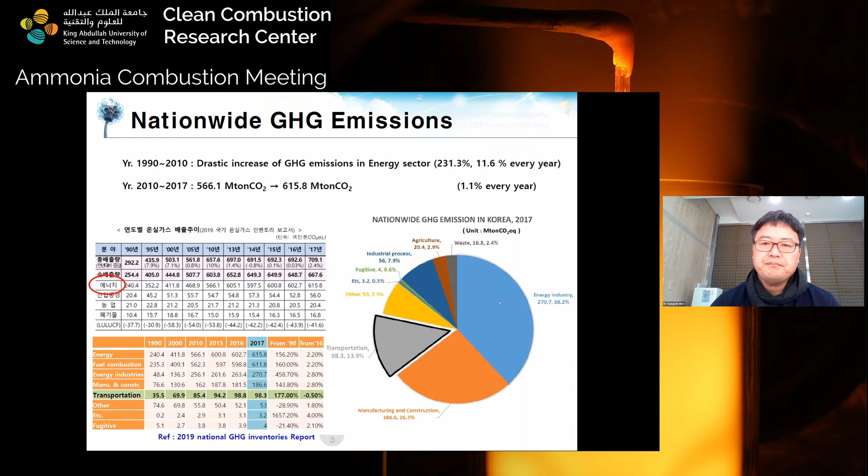This is our previous research and current research. We are one of the governmental research institutes of the country. We have the Fuel Economy Certification Authority. As one of the authorities, we do public service, and we focus mainly on alternative fuels such as LPG, CNG, biodiesel, DME, hydrogen, and ammonia.

Most of the talk today is about the ammonia engine vehicle, which we started in the year 2013. We developed a prototype vehicle at that time. These days we started fuel research again for marine engine applications, and I would like to talk a bit about that too today.

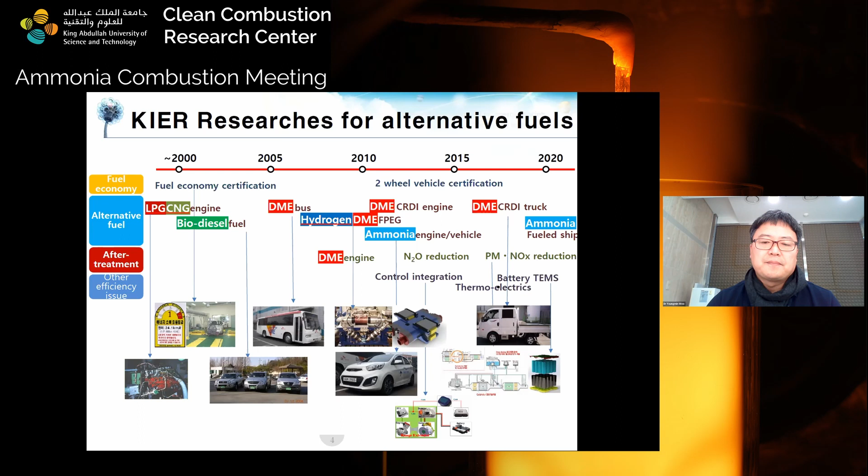This is the picture of the prototype vehicle. We named it AmVeh - ammonia vehicle, abbreviated as AmVeh. We developed the vehicle and drove it on real roads to testify the fuel for the conventional engine and vehicle.

This slide shows quite a historic image of why people started to have interest in ammonia fuel. It goes back almost 20 years. In the future, people thought we have to utilize renewable energy to maintain the total energy system, and they think the fuel should be carbon free and low energy consumption, meaning low cost.

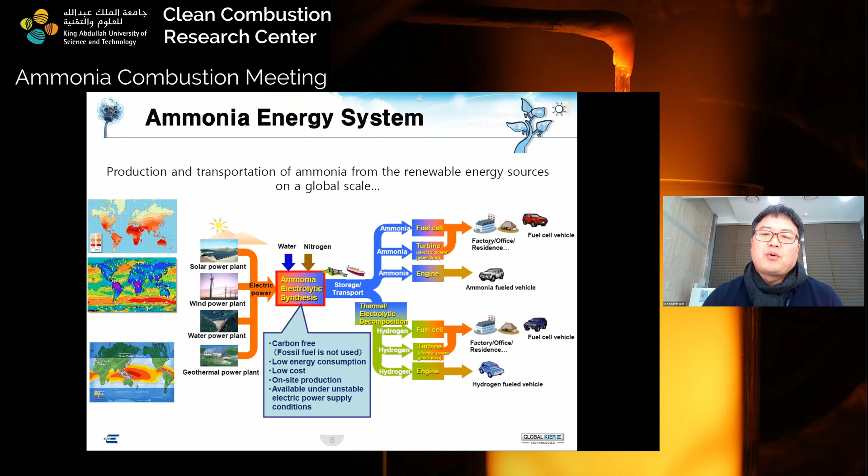So the fuel must be produced on site, and we have to utilize electricity to produce the fuel. So ammonia was considered first at that time, since we can use it in fuel cells, gas turbines, or engines. This is the starting point of the research.

This shows ammonia production. These days we have a similar quantity, about 200 million tons per year. People say we consume 3% of total energy to produce ammonia these days. But with the decarbonization movement in the energy sector, we think 10 times the consumption of the fuel is expected from 2030 to 2050.

By 2050, we have to increase the production a lot more than that.

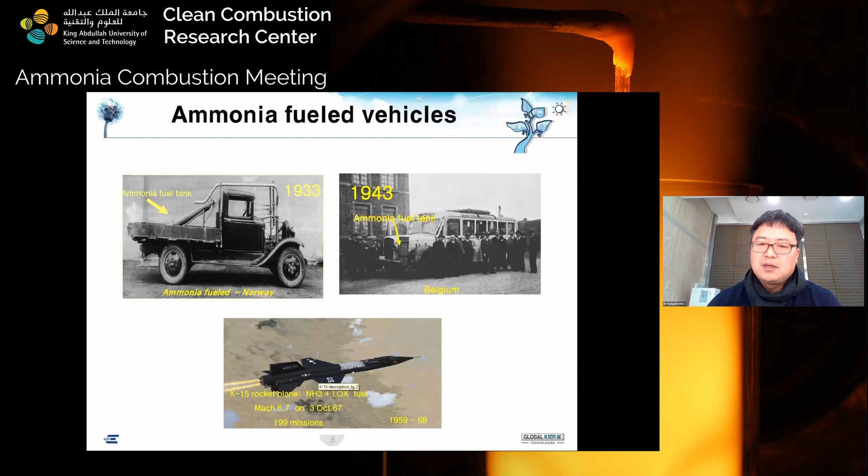Recently, the University of Michigan developed a vehicle prototype using ammonia and gasoline together. They started the engine with gasoline, then consumed 80% ammonia at full power, and drove the car from Detroit to San Francisco in 2007.

In 2013, we developed another prototype, as I'll show you in this part of my talk. We applied 70% ammonia and 30% gasoline, using separate fuel injections with a programmable dual fuel ECU.

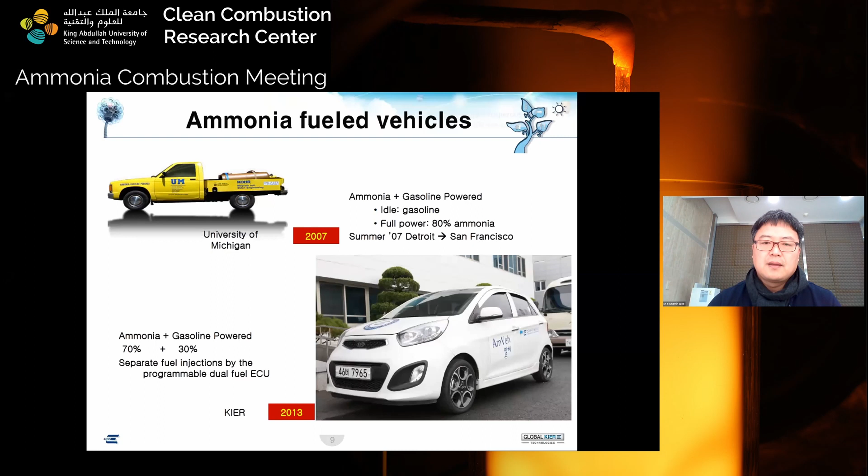This is an example of the fuel properties, with ammonia at the bottom line. We see that ammonia has a low calorific value and low air-fuel ratio. This column shows energy content in terms of the stoichiometric fuel-air mixture.

With this figure, we see 2.64 for ammonia, compared to 2.58 for gasoline. That means in the mixed state, we can apply ammonia and expect slightly more power than gasoline, not much more, but slightly more.

So we can apply ammonia in conventional gasoline and diesel vehicles as well. We tried to make another ammonia prototype vehicle in a more advanced fashion.

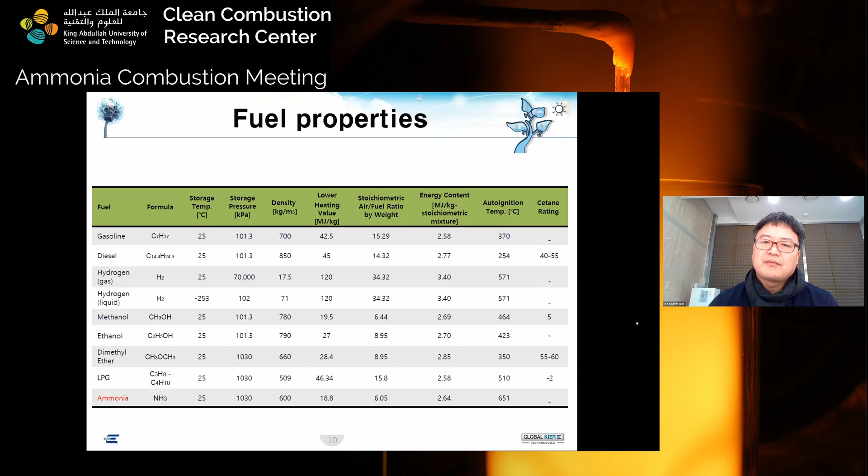This is about the engine experimental setup for the SI engine application. At that time, the Hyundai KIA Motor Company developed a bi-fuel engine and a bi-fuel vehicle that could run on LPG and gasoline selectively.

We installed the engine in the dynamometer shown in this figure, and we applied ammonia and gasoline with separate fuel injection in the intake manifolds using the ammonia-gasoline dual fuel ECU, so we could put as much as we wanted for both ammonia and gasoline.

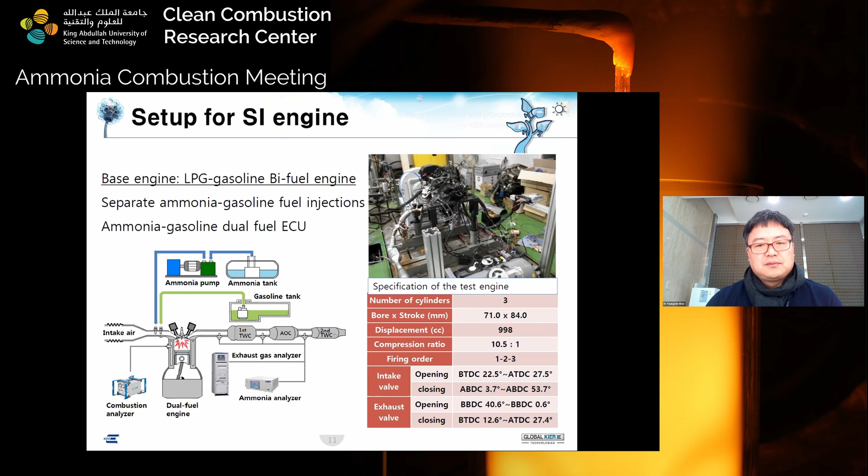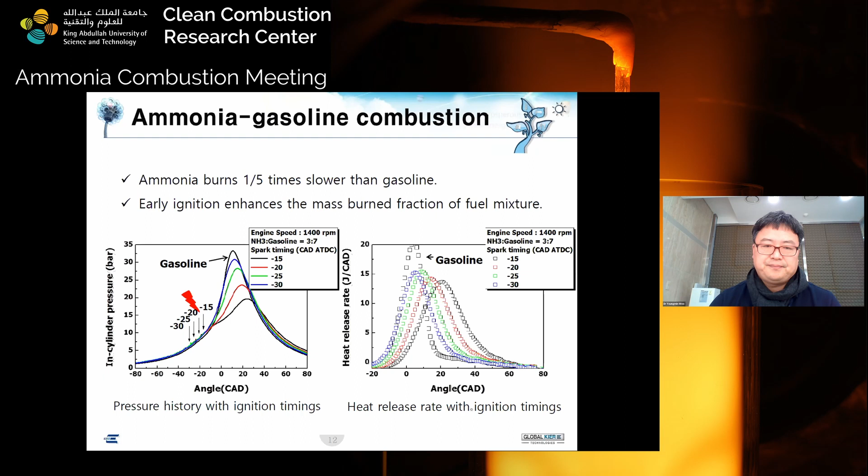We run the engine, for example, at 1400 RPM with full load, increasing the ammonia ratio of the total fuel. As the ammonia fuel fraction increases, we get the same torque output up to some mixing ratio, about 70%, then it decreases abruptly in this engine. The spark timing is advanced a lot with higher ammonia mixing ratios.

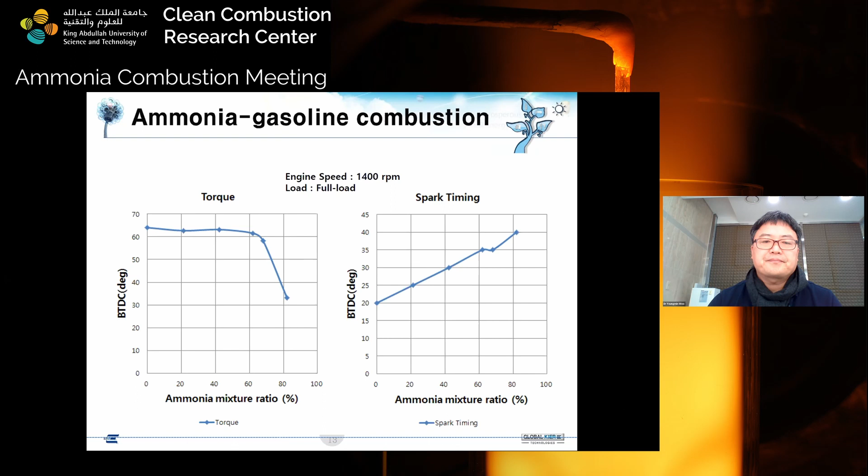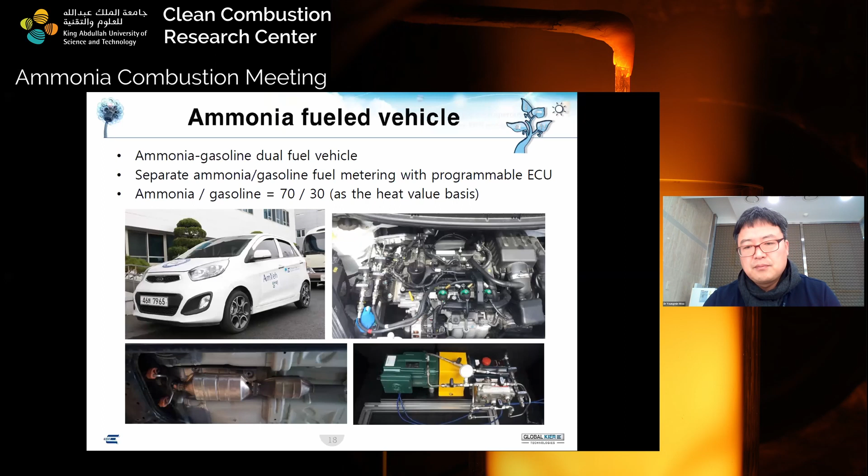This is the prototype of the vehicle, and the right-hand side shows the engine room of the vehicle. We have a different array of injectors for both ammonia and gasoline, a catalyst at the bottom of the vehicle, and the fuel pump as well.

After that success, we tried to apply ammonia in a diesel engine as well. So we applied a similar experimental setup, and we have another diesel engine to test the ammonia as shown here. At that time, we applied the ammonia in the intake manifold as we did in the SI gasoline engine, and we applied it to the diesel engine.

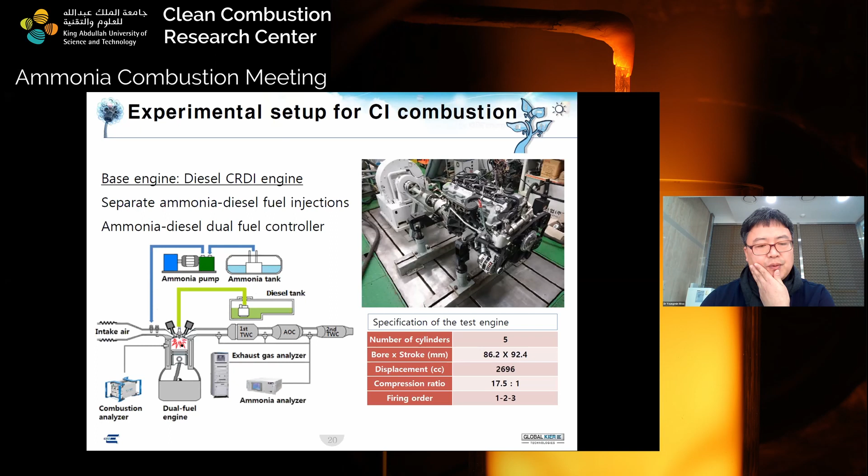At that time, we tried to reduce diesel fuel quantity, but we were not so successful at the time. We had to add more diesel to make combustion happen in some cases.

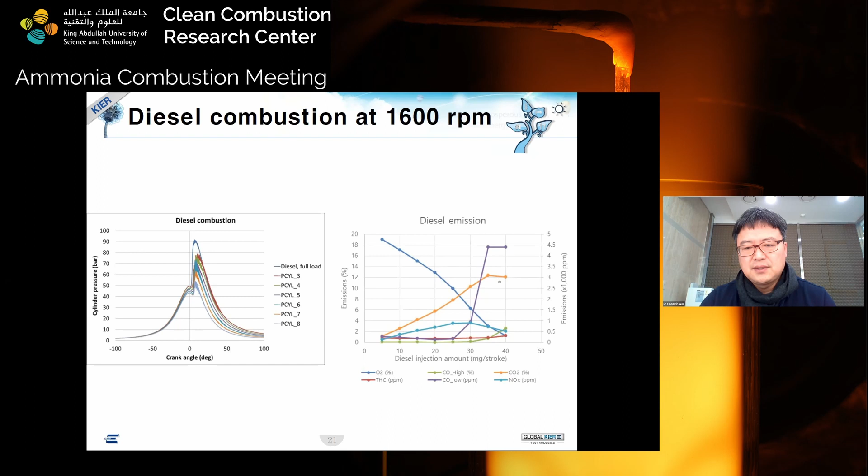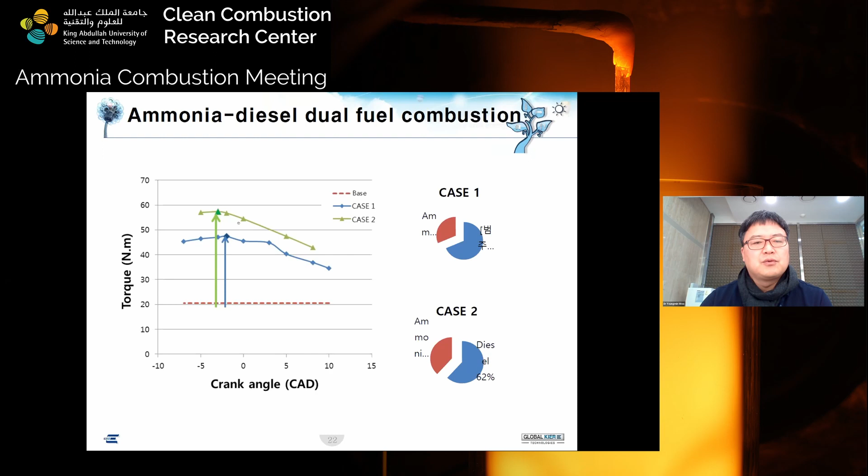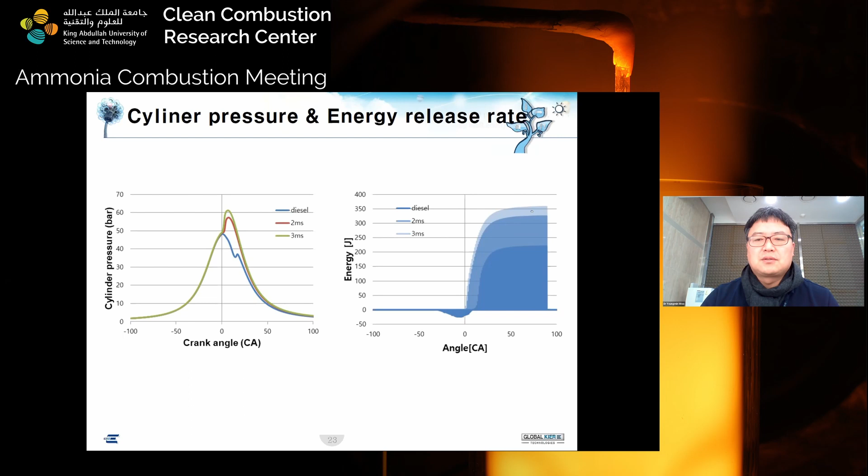This is the cylinder pressure trace on the left-hand side, and we have the energy release on the right-hand side. When you apply diesel only, this shows the amount of energy released, and when we apply ammonia, we have a somewhat larger energy release.

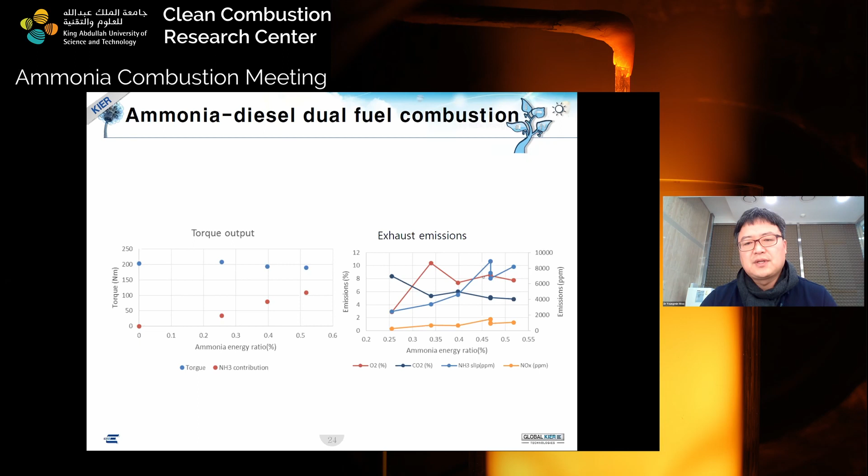This is torque output and emissions with ammonia-diesel dual fuel combustion. The baseline is the diesel case; we applied ammonia and tried to maintain the same torque output. With these conditions, we compared the emissions, and we have quite large emission of ammonia in this case, with a moderate increase of NOx emissions. In this case, we were only successful with 50% of the fuel from ammonia; we couldn't reduce the diesel fuel ratio further, so it was not fully successful at the time.

After that, I was away from ammonia research for some other work, and then we started going back to ammonia these days as well.

So we set up another engine, and we applied different kinds of fuel - LPG, natural gas, and ammonia. We applied a combination of fuels into the intake manifold, as we did before, and we applied diesel in the combustion chamber. We tried to overcome the combustion stability and quality issues, and achieve better emissions.

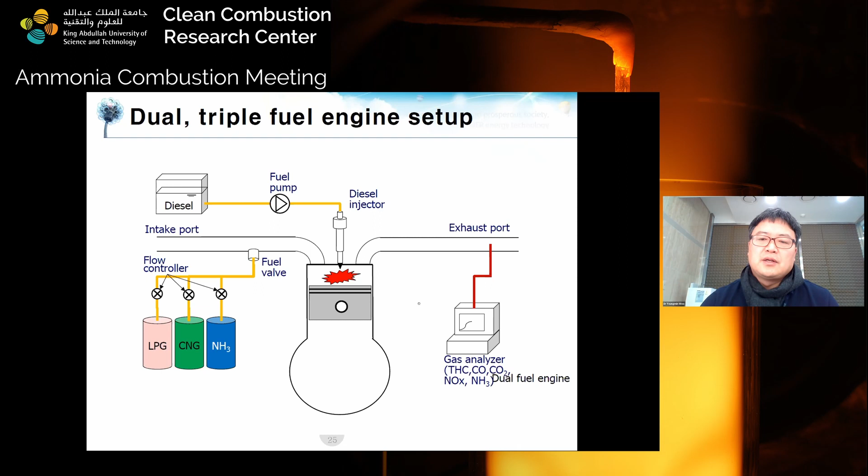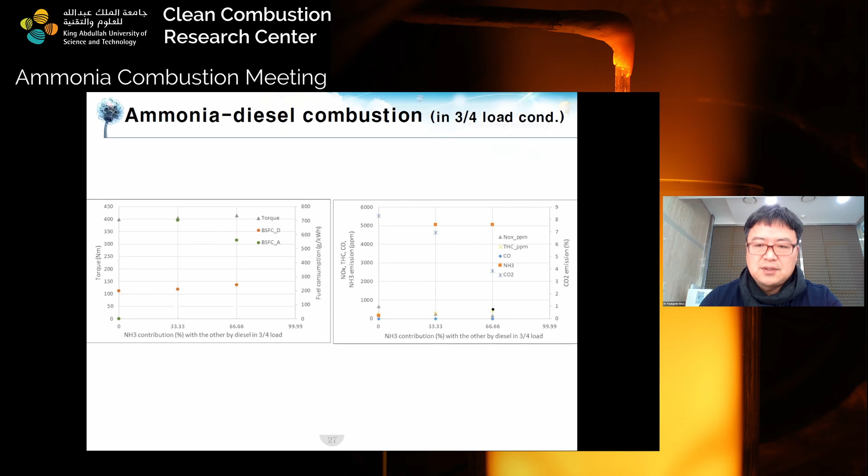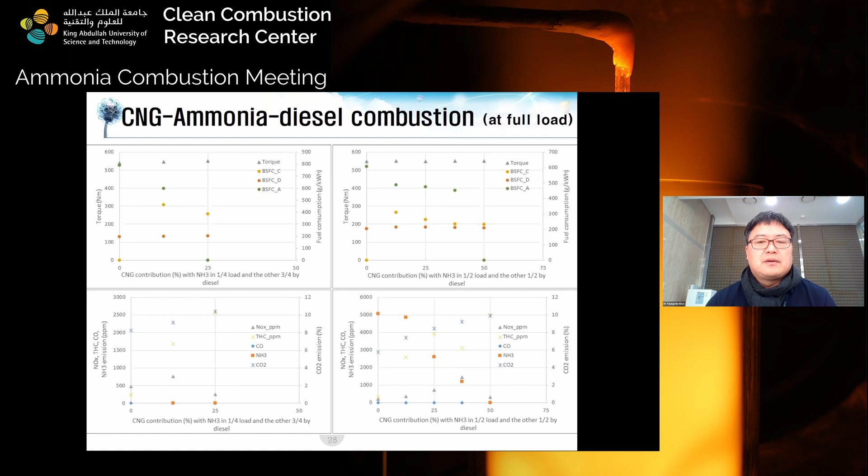So we are still struggling to achieve better combustion with ammonia fuel, and with other fuel supplying methodologies as well.